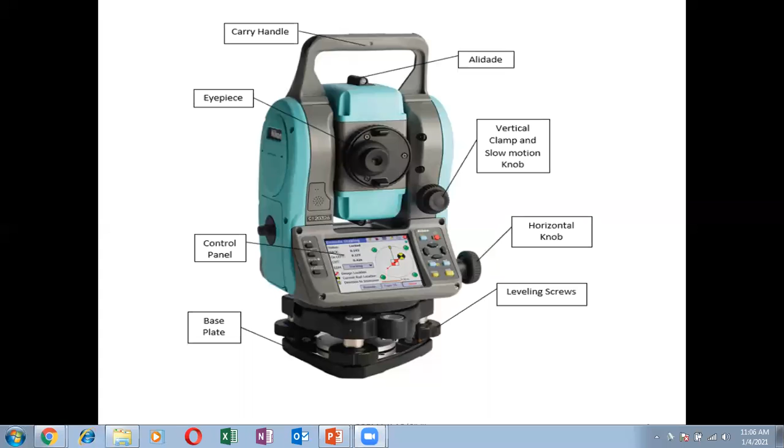Okay, so we've almost discussed all parts this morning. So, setting up the instrument - initially every day when we set up the instrument, the basic things we have to do: first is centering of instrument and second is leveling. These two combine to the topic of setting up the instrument.

So centering. Before that we must know what is our survey point. The tripod - I'll cover it in the afternoon class. This is a tripod with 3 legs. Whether it is plane table surveying, theodolite surveying, or leveling using dumpy level, we will have one particular point as the survey point. From this point the distance will be calculated, the levels will be calculated.

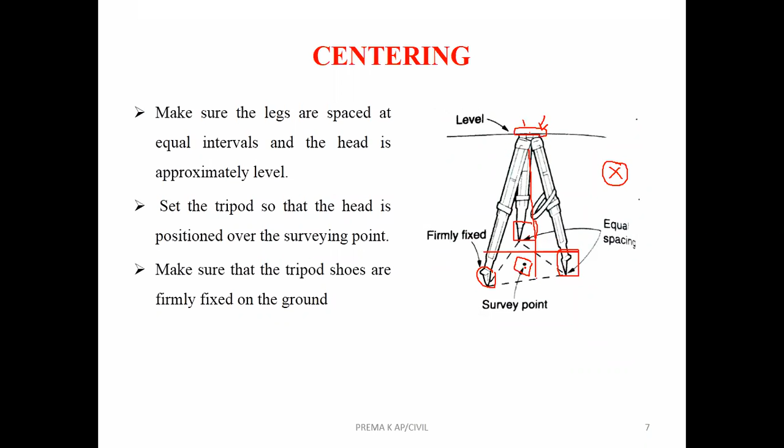So this point like this, so we have to adjust the instrument.

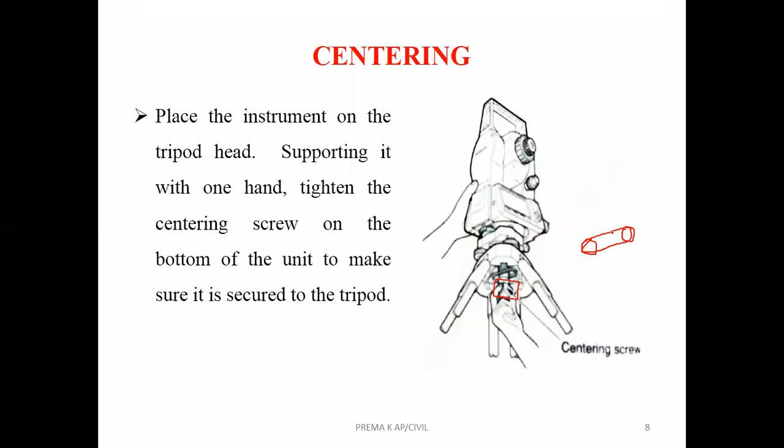Can you see the centering screw is not in circular shape, it is in a little bit oval shape. Can you see that? You see here, it is in oval shape. Yes ma'am. So we can move the instrument here also, so you can adjust the instrument.

Initially we will fix the centering screw. After that, turn the optical plummet focusing ring to focus on the surveying point.

Through this optical plummet eyepiece, if we focus, it will be like this. The surveying point may be somewhere in this circle, so we have to adjust the instrument - move front or back to adjust the center point to the center point of this reticle.

Okay, have you got my point? Yes ma'am, okay yes ma'am. So next is leveling - centering, that's all. So next leveling - what do you mean by leveling in a tripod stand?

The head of the tripod should be at the same level, and the bubble tube body too. The bubble should be in the center of the circle. So how many bubble tubes do we have in this total station?

Two: plate bubble and circular bubble. So adjust the leveling foot screws to center the surveying point in the optical plummet circle. This is the base plate. We have to adjust the leveling foot screw to center the surveying point, regarding the centering continuation, until the center point coincides with the center of the optical plummet circle.

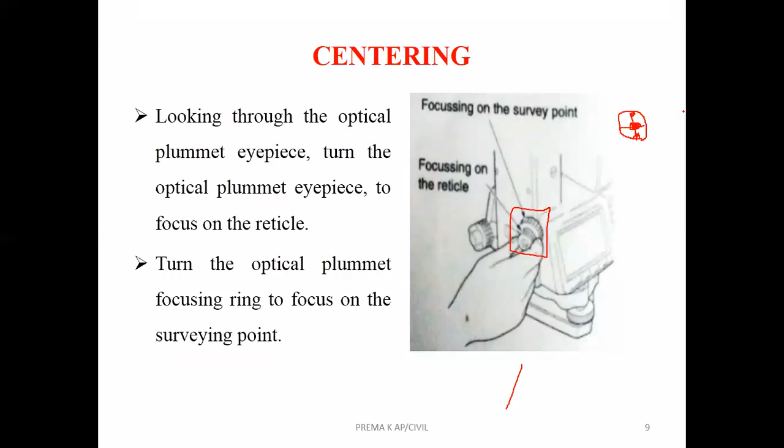Next step is to bring this bubble to the center level. This is the circular bubble, this is how it looks. Initially it will be like this, so we have to adjust the tripod legs. The tripod leg adjustments are here. We have to adjust the tripod legs until we finally achieve this position.

Center the bubble in the circular level by either shortening the tripod leg closest to the off-center direction of the bubble, or by lengthening the tripod leg farther from the off-center direction of the bubble. Adjust one more tripod leg to center the bubble.

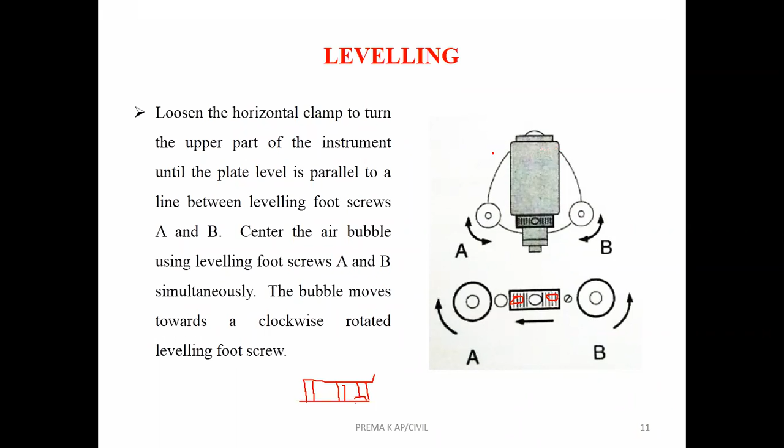Yes ma'am, at this point you have to keep the telescope in this position. This is step number 1. Step number 2: turn the upper part so the plate level is now perpendicular to the line between leveling foot screws A and B. Now the plate level will be like this.

Whether the bubble stays here or here, based on that we have to adjust screw C. So turn the instrument, and once the bubble stays in the center in all directions, then leveling of the total station is done. Do you have any doubt in centering and leveling? No ma'am. Okay, so we have completed leveling manually.

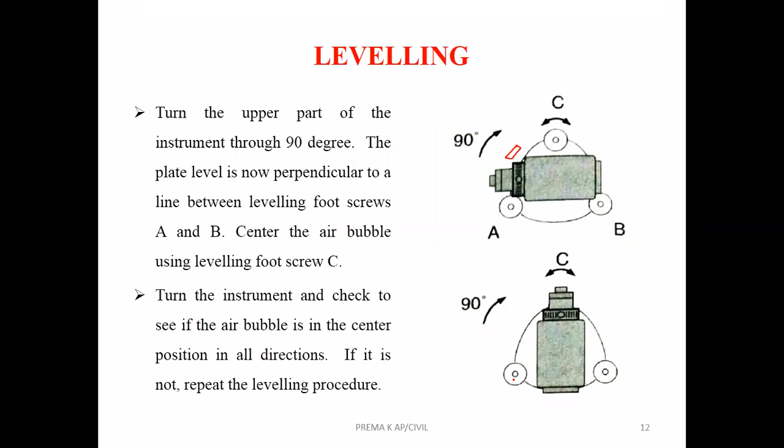One more option available in the total station is leveling on screen. So now we have to turn on the total station and press the button. Among the four soft keys, you will have a tilt option, maybe F3. If you click tilt, on the second page of the measurement mode, it displays the circular level on the screen. So what is the function of tilt?

Level on the screen, adjusted using tripod legs to the visual level. Now this circular level, using sensor, is available on the screen like this. This dark circle denotes the bubble. A small black circle indicates the bubble in the circular level.

The range of the inside circle is plus or minus 4, and the range of the outside circle is plus or minus 6 minutes. Whatever reading is taken using total station is given in degrees, minutes and seconds. So the allowable correction value is plus or minus 4 minutes for the inner circle and plus or minus 6 minutes for the outer circle. Here we can see the circular bubble.

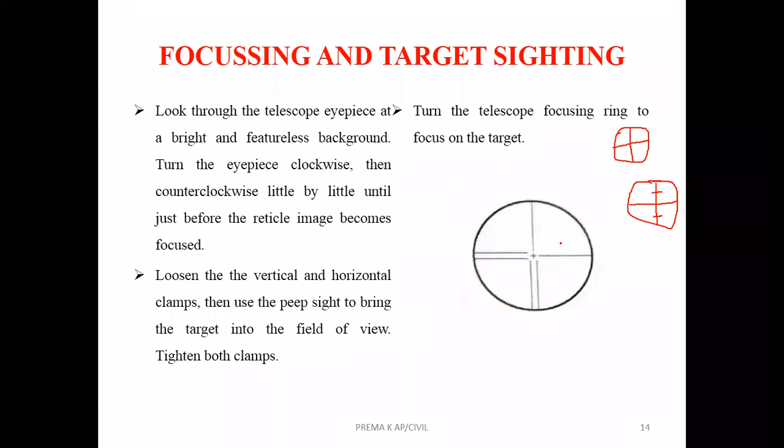This is the minor adjustment mentioned. Turn the vertical and horizontal fine motion screws to align the target with the reticle. The last adjustment of each fine motion screw should be in the clockwise direction. Readjust the focus of the focusing ring until there is no parallax between the target image and the reticle.

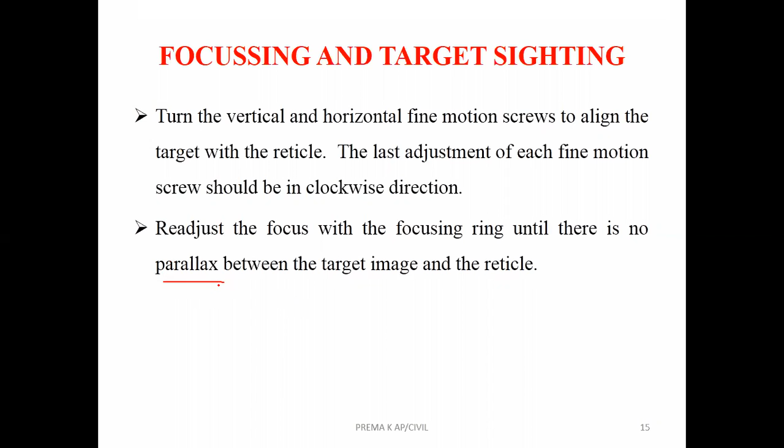This is a relative displacement of the target image with respect to the reticle when the observer's head is moved slightly before the eyepiece. When we look through the eyepiece, sometimes we look very close, and sometimes we look from a little further away. Because of these small manual errors, we note the readings incorrectly.

So to eliminate parallax: parallax will introduce reading errors and must be removed before observations are taken. Parallax can be removed by refocusing the reticle. So finally when we focus properly, this parallax error is a manual error that occurs while taking readings.

ரீஃபோக்கஸ் பண்ணோம்னா parallax error eliminate பண்ணிடலாம்.

நெக்ஸ்ட், நம்ம டோட்டல் ஸ்டேஷன் பவர் ஆன் பண்ணதுக்கு அப்புறம் என்னென்ன நடக்கும் என்று பார்ப்போம். Once the total station is powered on, a self check is run to make sure that the instrument is operating normally. நம்ம பவர் பட்டன் ஆன் பண்ணதுக்கு அப்புறமே there will be a self check on all the parameters to make sure that the instrument is without any error.

தென் பாஸ்வேர்ட், நம்ம ஒவ்வொரு டோட்டல் ஸ்டேஷன்ல ஒவ்வொரு யூசரும் வந்து பாஸ்வேர்ட் செட் பண்ணிக்கலாம். அவங்க ஜாப் நம்ம பண்ற எல்லா ஒர்க்குமே வந்து ஒரு ஜாபா கிரியேட் பண்ணலாம். When password is set, input password and press enter. பாஸ்வேர்ட் இருந்தால் நம்ம ஃபர்ஸ்ட் பேஜ் வந்து பாஸ்வேர்ட் டைப் பண்ற பேஜா இருக்கும். அப்போ பாஸ்வேர்ட் டைப் பண்ணிட்டு என்டர் ப்ரெஸ் பண்ணுங்க.

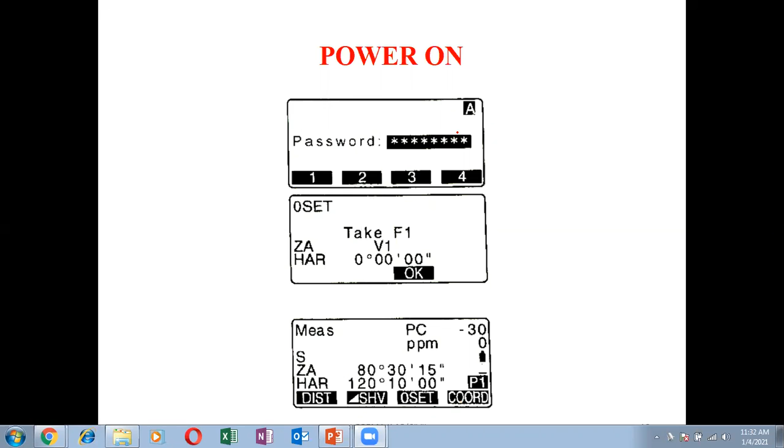So next we will see in the demo class in the afternoon session.

So do you have any doubts? No, ma'am. No, ma'am. Okay. So yes, okay, let's start.

Start with ma'am, சொல்லுவா ma'am. I am always just above the ground level. I prevent the water surface water from entering the building. I am immediately after the foundation.